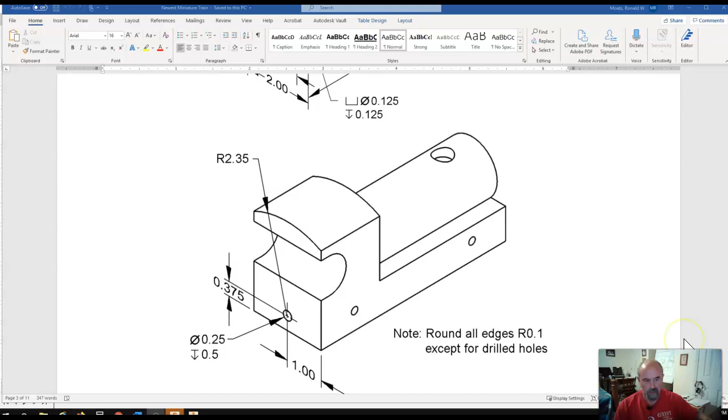This week we're starting off with the train project, and this is what that looks like. Let me shrink this down a little bit.

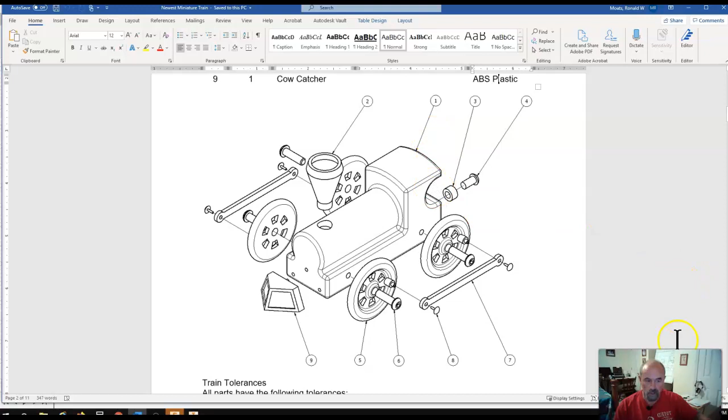So this week we're going to start creating these components in either Inventor, Fusion, or Onshape. If you're watching this video right now, this is for Fusion 360. Looking at this parts list, we're going to be building number one, the train body, today. This is where we're starting, and this is what we're going to be doing for the next 2 days, just building this single part.

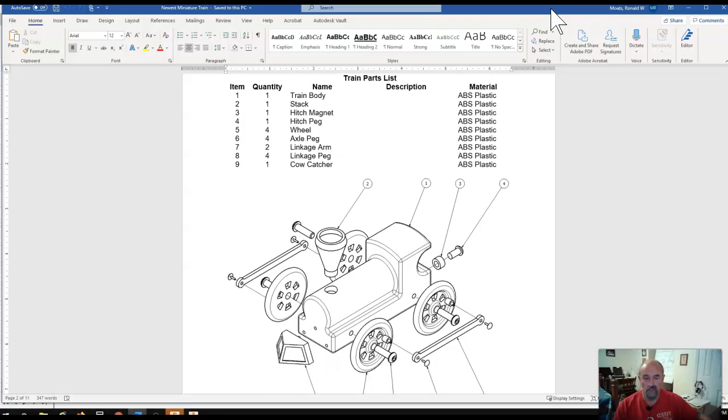So I would like you to possibly print out this dimension sheet, there's 4 or 5 different variables, or take a picture of it with your phone so you can access it while you're working, or any way you can figure out to make this work is good. I am going to walk you right through the process, so if you're doing split window or following this and then doing it, whichever works for you, I completely understand.

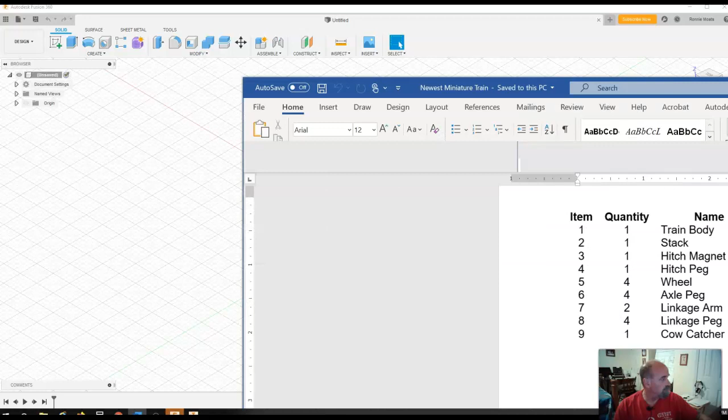Let me pull this out of the way right now so I can see it while I'm working. I've got it up on another screen. Okay, I have Fusion up and running, ready to go.

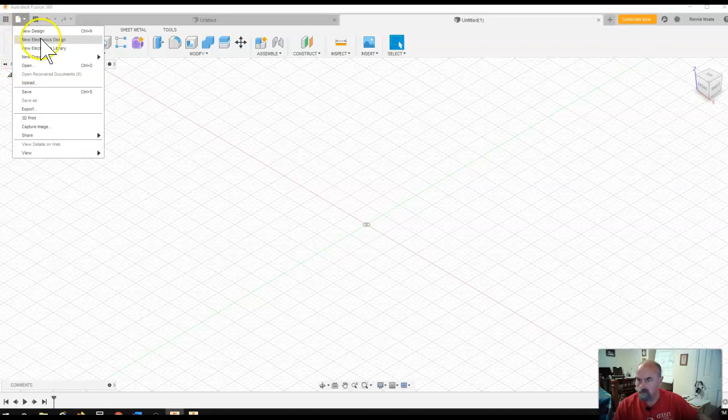After you open it, we are going to come up here above the tool ribbon to File, create a new design, and I need to name this. I'm going to start right off by naming it so I don't lose it. This is train body. Click Save. We've got it saved.

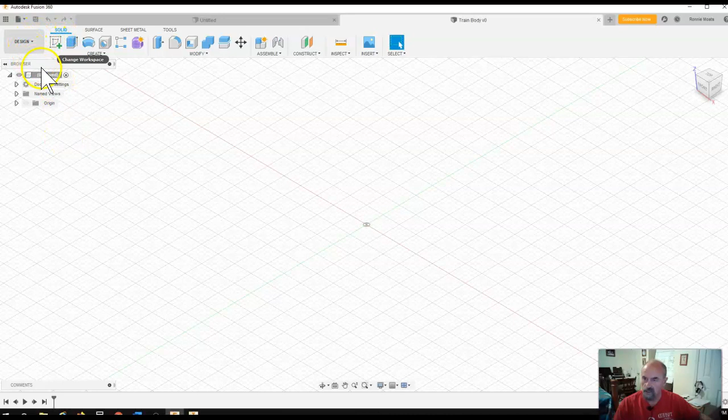First thing I'm going to do is create a new sketch. Come up to the tool ribbon under Solid, create Sketch, and I'm going to click on the front plane. Okay, now before I go any further, I want to make sure I'm working in inches. Document settings, units, inches - I'm good.

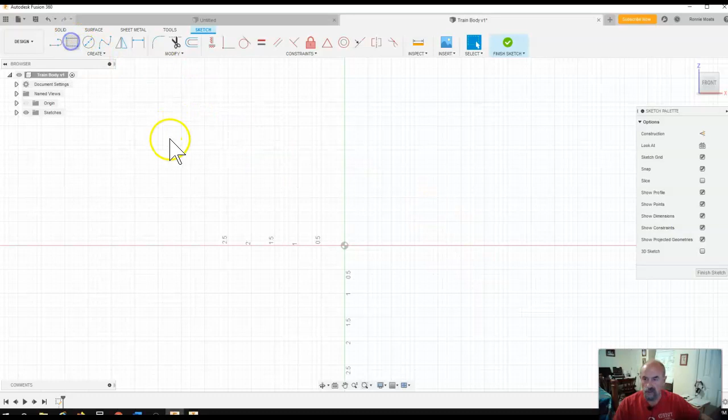Okay, looking at this train, I'm going to create an overall block to subtract away from and then add to, but I want to start with a big rectangular block that's as big as the entire train body. So I'm going to start with a 2-point rectangle.

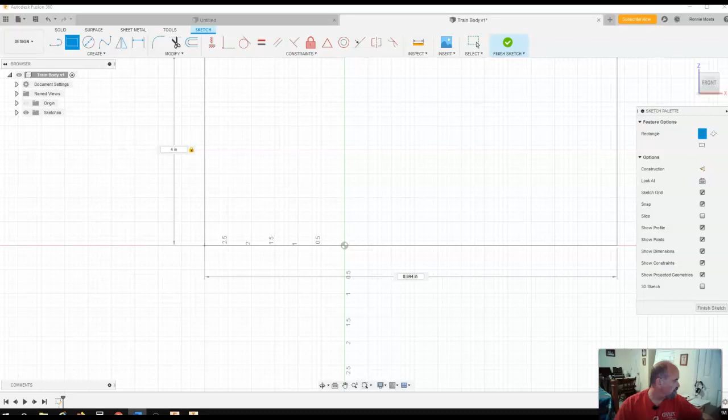I'm going to click on the horizontal line, and in the height window, I do not know how tall this is yet, so I'm going to simply make it 4 inches tall. Tab over to the width measurement, and it says that this is, hold on one second, 5.5 inches long.

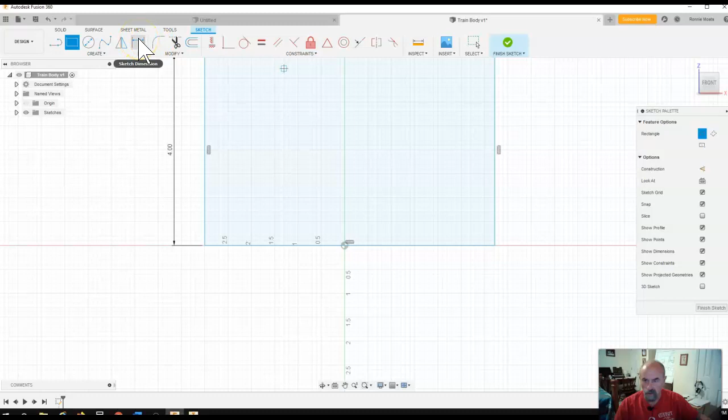So, 5, tab, click once, and I lost my measurement, so I have to come up, click on my sketch dimension, click on the one end, come to the other end, and make that 5.5 inches.

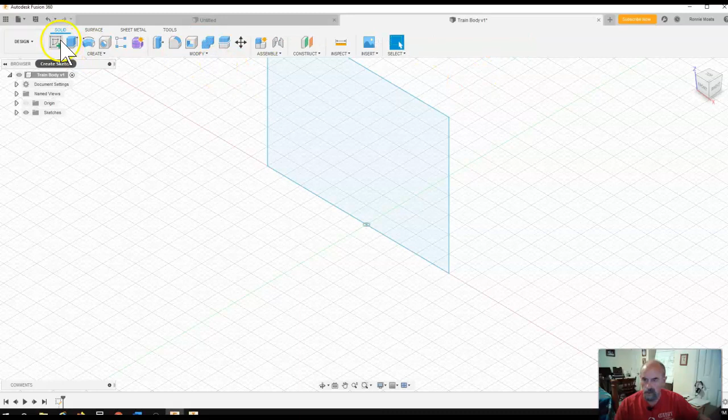And finish that sketch, come up to Solid, click on Extrude, and I'm going to extrude that. Let me check this measurement over here really quick - total width of this is 2 inches. So I now have this big rectangular block.

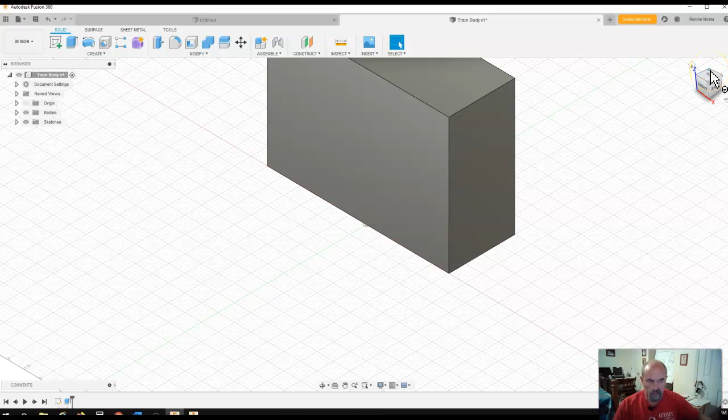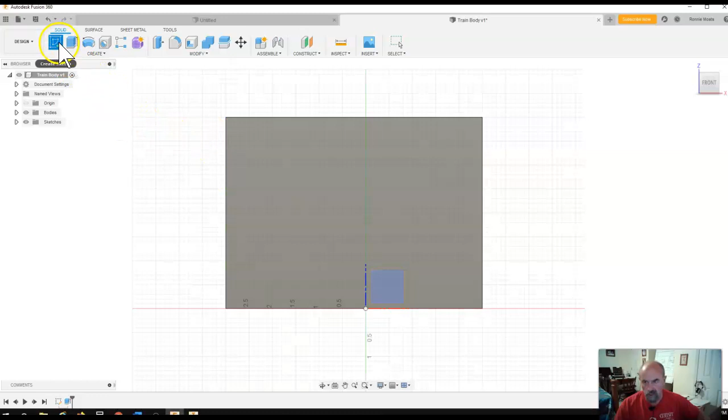The next thing I'm going to do, let me push down on my wheel on my mouse, hold it down so I can pan down here a little bit. I am going to put a new sketch on the side of this, and I'm going to draw another rectangle, starting up here to the left outside of the rectangle and coming down in, such as this.

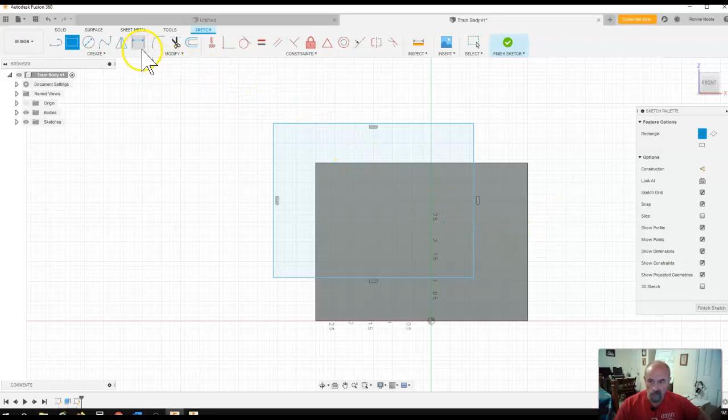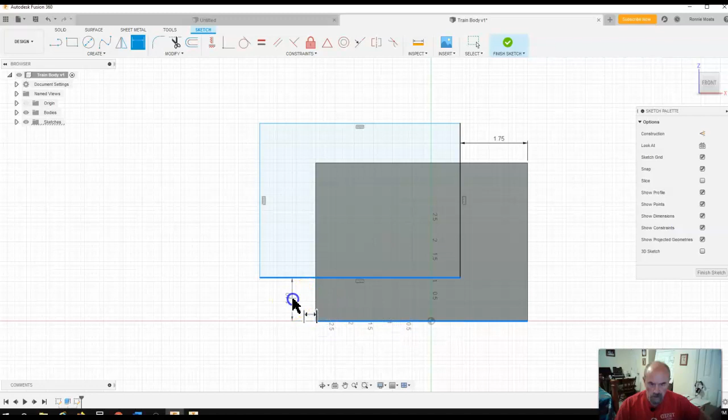Now I don't have a dimension for this rectangle, but I know that this part of the train body here says that it's 5.5 minus 1.75. So I need to dimension this part of my rectangle to be 1.75 inches. And then I need the bottom of this new rectangle to be 0.88 inches from the bottom.

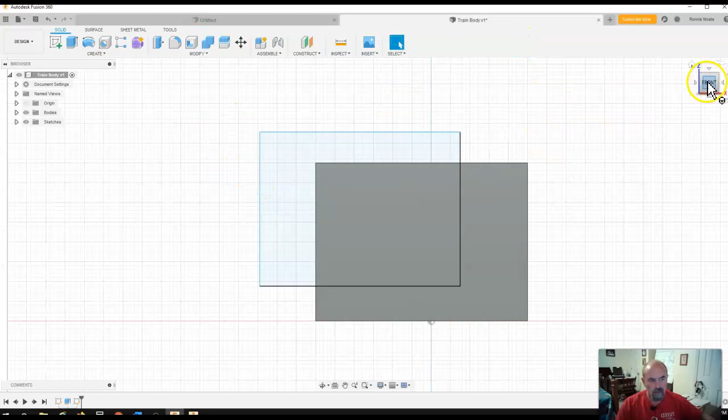All right, I'm going to finish that sketch. I'll come up to the View Cube and click on the Home feature, and I'm going to extrude this, but over here in my extrude window, I want to subtract this.

Operation: New Body, Join, Cut, Intersect - I want to cut this. So I need this arrow to be flipped around. In the direction window in the extrude window, I need to click down and flip that.

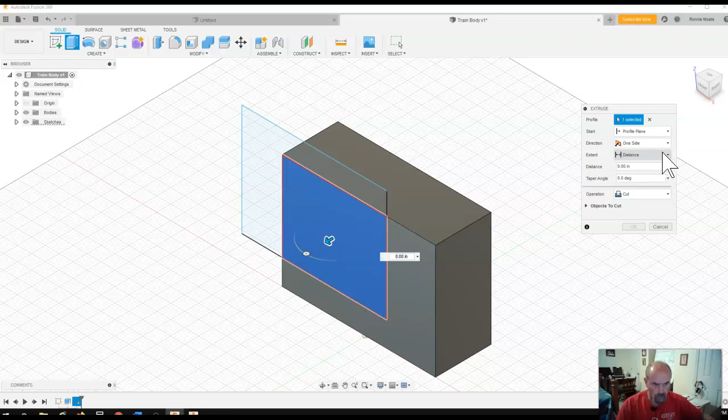I guess I have to grab the arrow and drag it the other way, like that. Click OK. So I should have this L-shaped body here now.

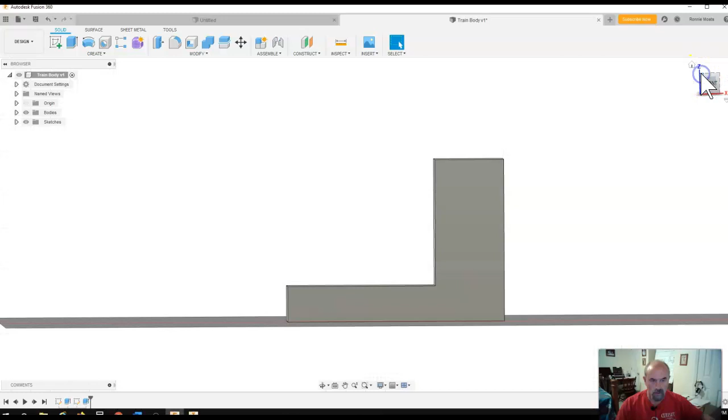Alright, I'm going to put a sketch on the front of this train body here now. Create a new sketch and click on the front portion of this L-shaped rectangle I have.

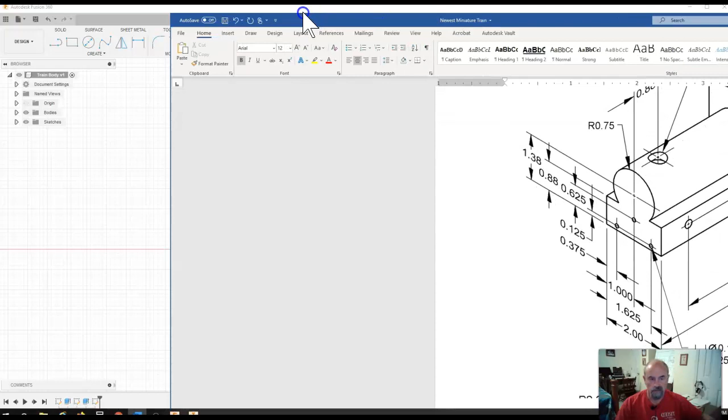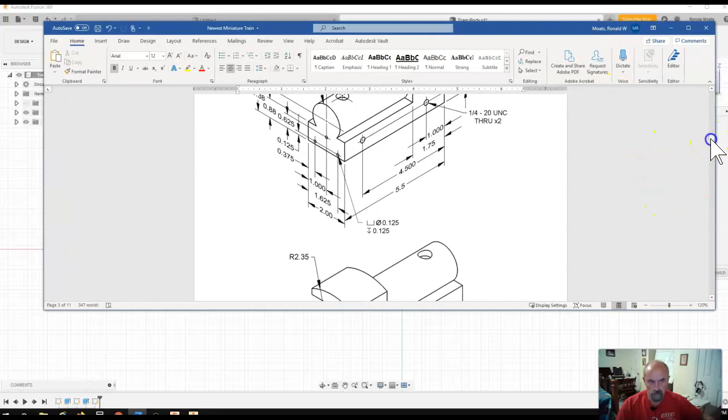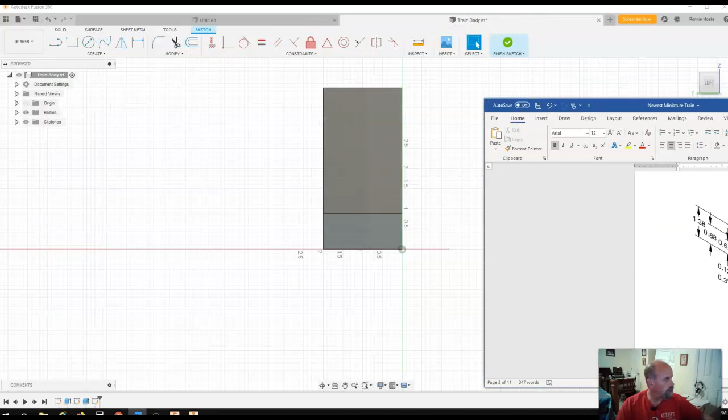Now, looking at this, it tells me that the size of this drum shows right here to have a radius of 0.75, and that the center, if I follow the center line all the way out here, is 1.38 of an inch from the bottom. So those are the dimensions that we're going to have to create, use to locate that.

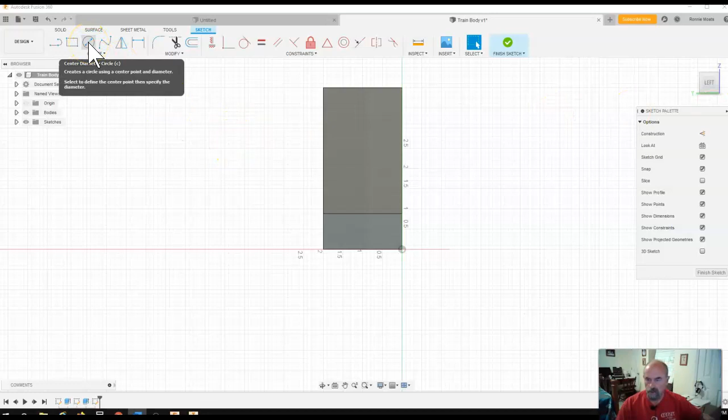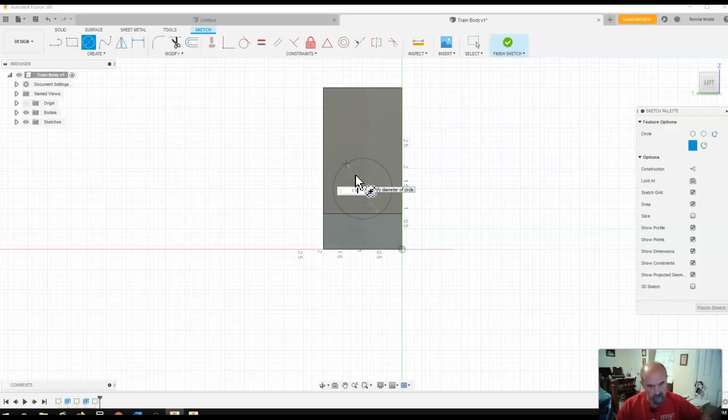Alright, so I'm going to start with a center diameter circle, and I'm just going to place the center point, and it tells me the radius is 0.75. Radius is only half of the circle, so I'm drawing a circle, so I need that to be twice that. So I'm going to, which is 1.5. Circle of 1.5.

Now, I need the center of this circle. I'm coming up to the tool ribbon to get the sketch dimension tool. Click on the center, click on the bottom line, and I need that to be 1.38. Hit enter.

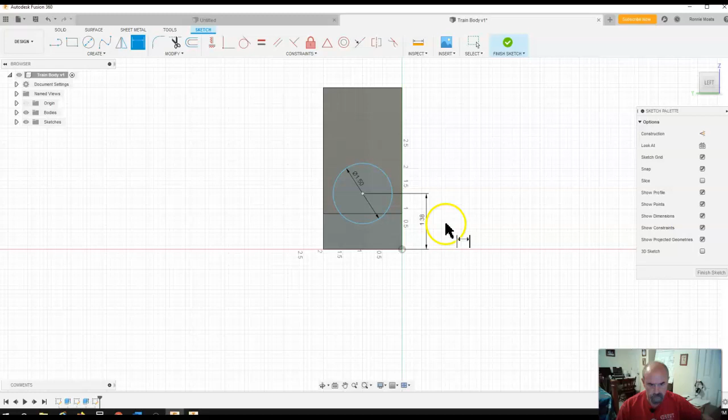And I think it's in the center, but I'm going to make sure anyways. I'm going to click on the center, come over here to the side. Yep, that's 1 inch, so that's in the center. Okay, I'm going to finish that sketch up now.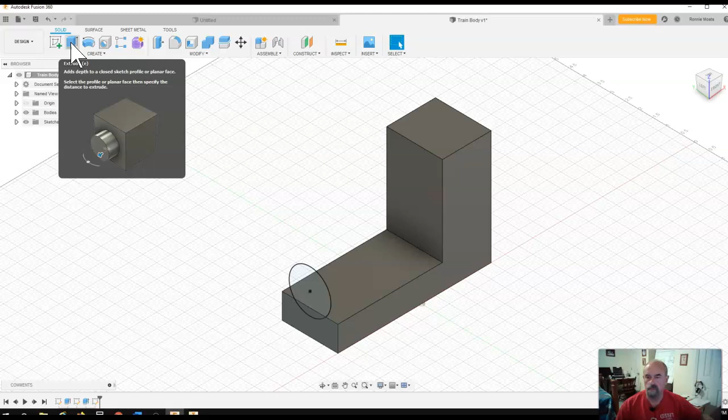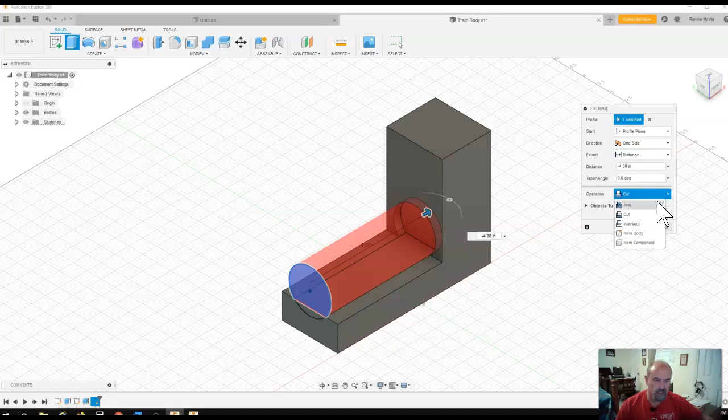Back up to the tool ribbon, to the extrude tool. Click on that part of the profile, and I want it to go the other way. I'm just clicking and holding down on my mouse button and dragging it until it goes through that edge there, just a little bit. And I don't want a cut operation. I have to come back here now and change this to join so that it's all solid. Click OK. Now I have that round tank look to the top or front of my train.

Now, the next thing that I'm going to do is shave off the top of this. All right.

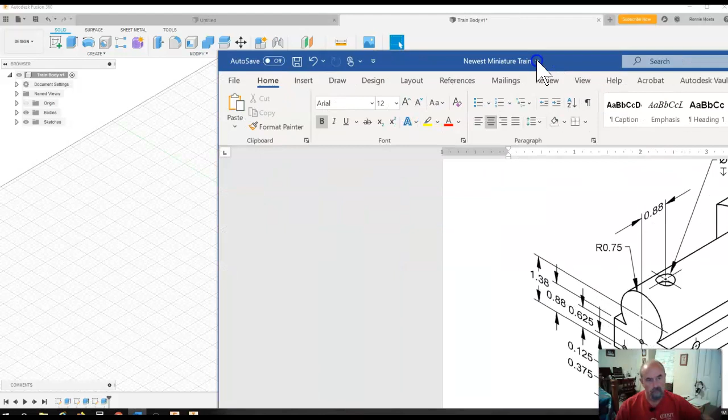So what I have to do is I have to switch views here to look at the back of this train, right here.

Now, it says here that the total height of this train, it says that the top of this train has a radius of 2.35. It also says that that radius comes from this center mark, and that center mark is 0.375 inches from the bottom.

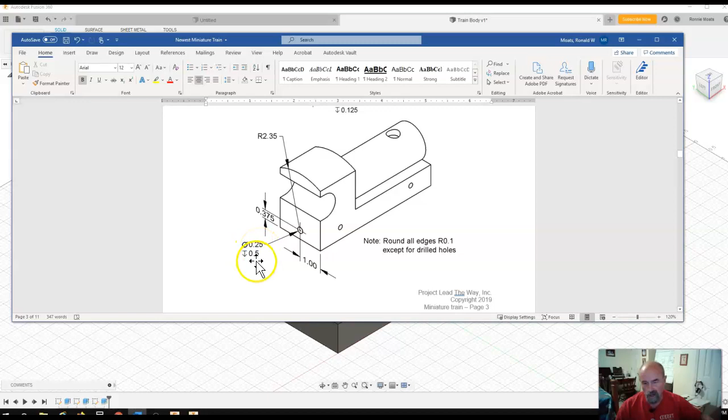That circle there is a hole. It has a diameter of 0.25, and this T with the arrow on it tells me that that 0.25 hole is 1/2 inch deep, or 0.5 inches deep. So that's what I'm going to start with.

As soon as I get this out of your way.

Okay, so I'm going to turn this around, come up here to the view cube, turn it around so I can see the back side, create a new sketch and click on the back side of this.

Sorry, Microsoft Word's running super slow on me and messing things up.

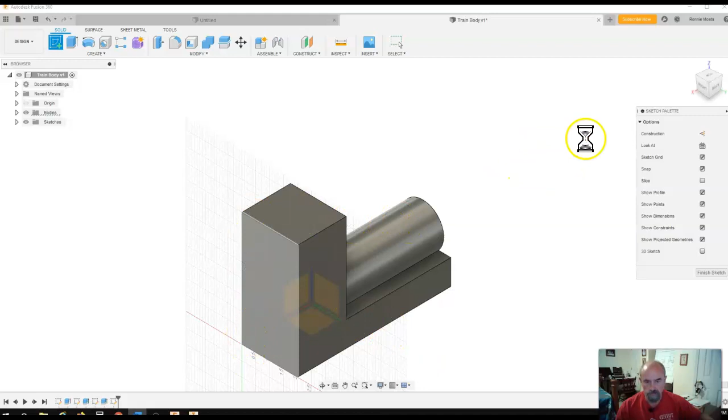Okay. Come on. So there, now I'm looking at the back side, and I need to place a new sketch on there.

And create a circle. That circle needs to be 0.25 inches in diameter. And it needs to be 3/8 of an inch from the bottom, which is 0.375.

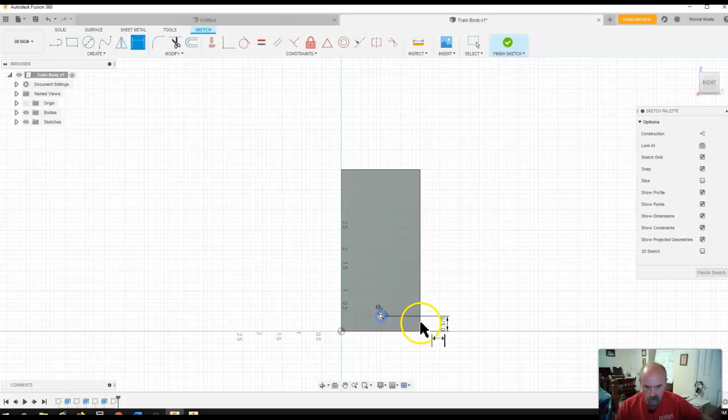Come on, there we go. .375, enter. I'm going to make sure this is in the center, so I'm going to click on the center of that again, come out to the outside edge, and just sit and wait apparently. Center to outside line. There we go.

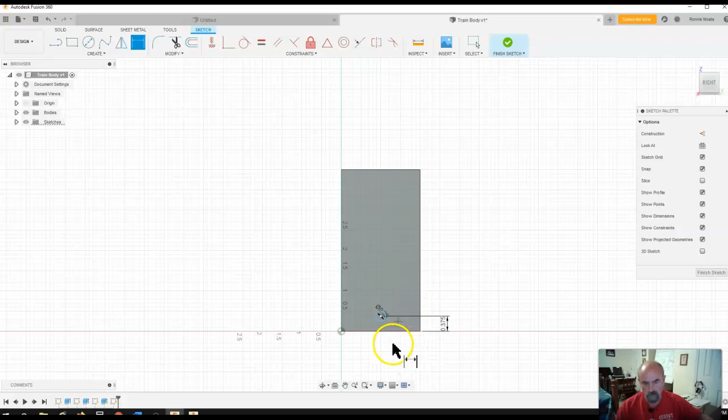Let me try hitting escape. Back up to sketch dimension. Click on the center, the edge, 1 inch, so it is in the middle. Okay. Finish sketch.

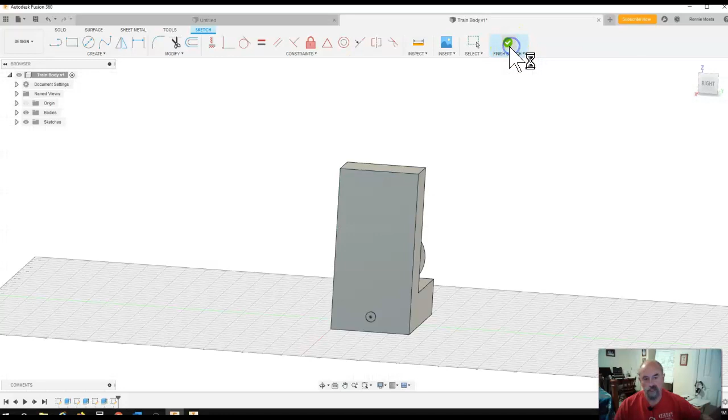Click extrude. Now, I'm going to click on that circle, and under operation I want to cut, and I want a distance of 0.5.

No target body, that's because it's going the wrong way. I have to grab that arrow and turn it around the other way. Now I have to come back. I dragged it too far, so I have to correct that with 0.5. Cut, distance, one side profile plane.

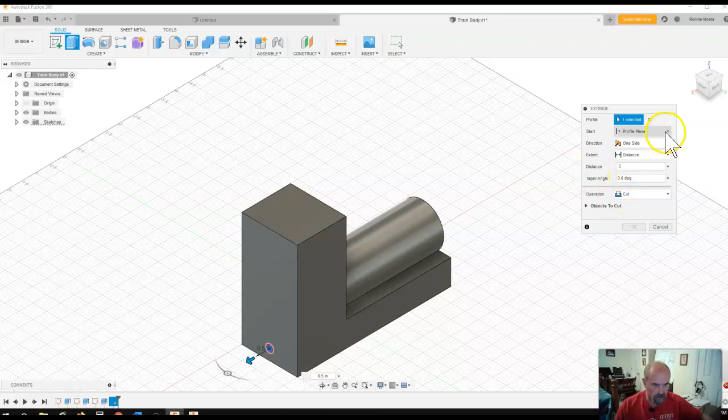Okay, why do you keep doing this to me? Direction.

Let's look at the more info. No body found to cut or intersect. I know, you're not letting me.

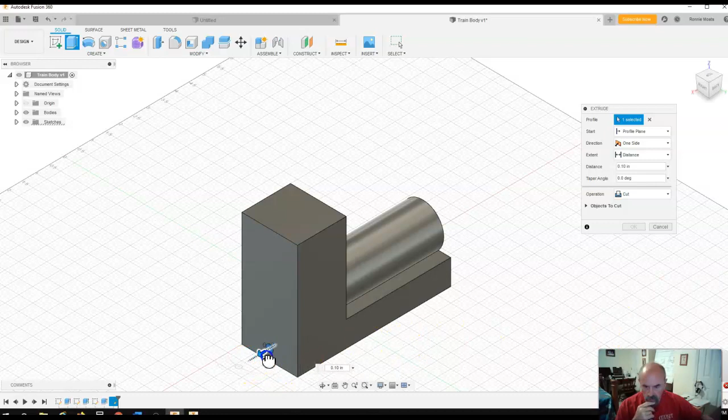Okay, for distance I put 0.5. I need to put negative 0.5. Negative 0.5, yeah. Once you flip it in Inventor, you don't have to designate negative or positive. I understand now.

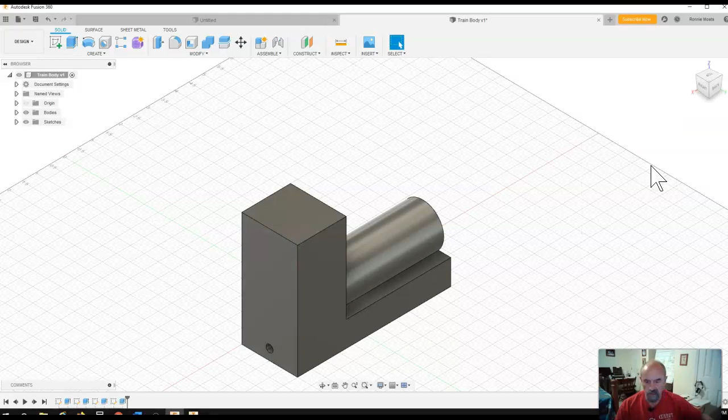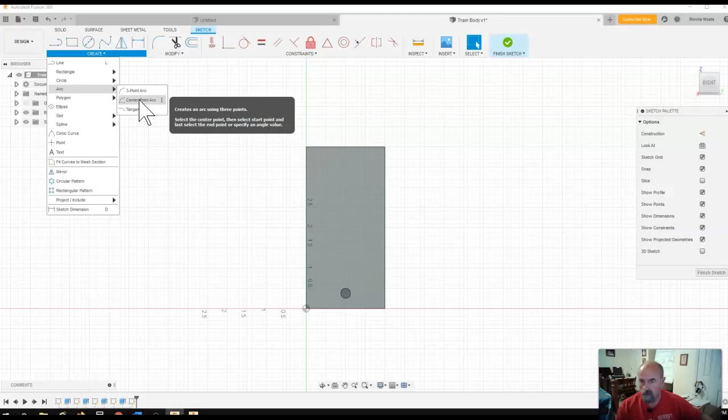Create sketch, click on this back side again. Now I'm in sketch mode. I'm coming up to the top here to create, clicking to expand, and I'm looking for an arc. I want a center point arc. Creating an arc using 3 points.

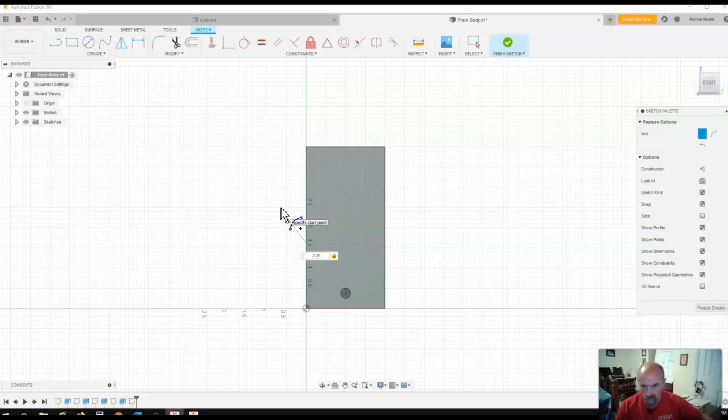I'm going to click on the center of the existing hole we just made, and come up here and type, the radius says that it's 2.35, and I'm going to click once outside of the body, come across the body out into the white space again, and click again. Now I'm going to hit escape on the keyboard.

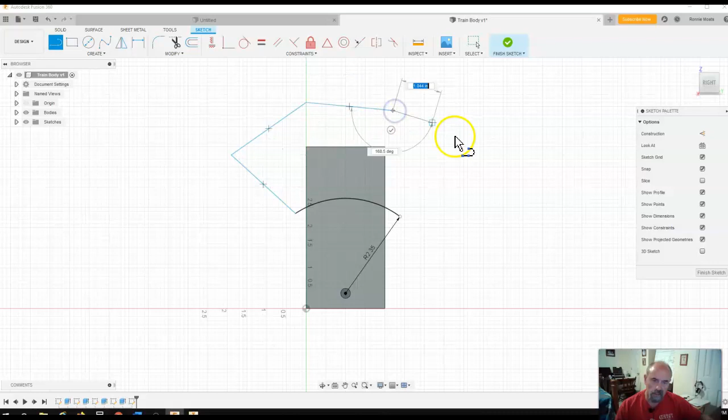And come up here to create a line. Click on the line, come back, and I'm going to click on this end of that curve. Just come up here, click once, click twice, click 3 times, click 4 times, and then come back and make sure that I'm touching the other end of that arc.

Okay, now I can see that it's blue here, so it has created a profile, a continuous loop. So I'm going to click Finish Sketch, click Extrude.

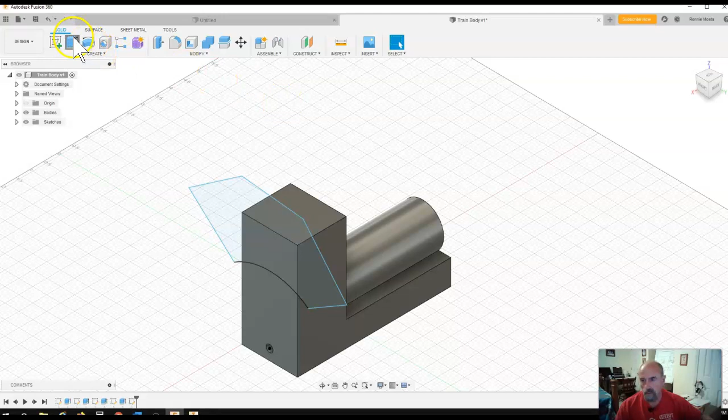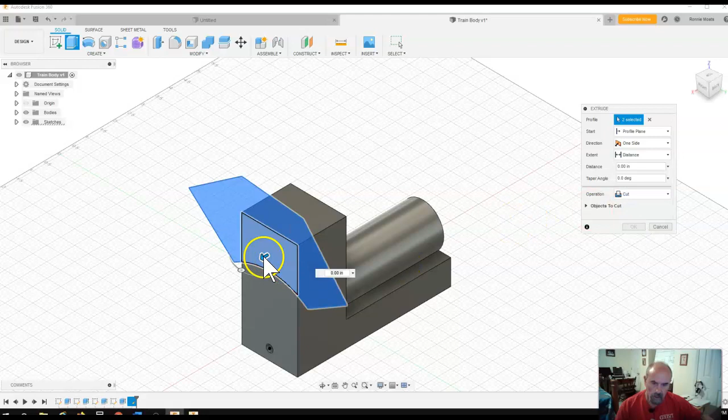Click on both profiles there, so I'm getting the whole thing, and come over to Operation in the Extrude window, click Cut, and I'm just going to grab that arrow and drag it all the way through it. And hit Enter or click OK. Either one will signify we are done.

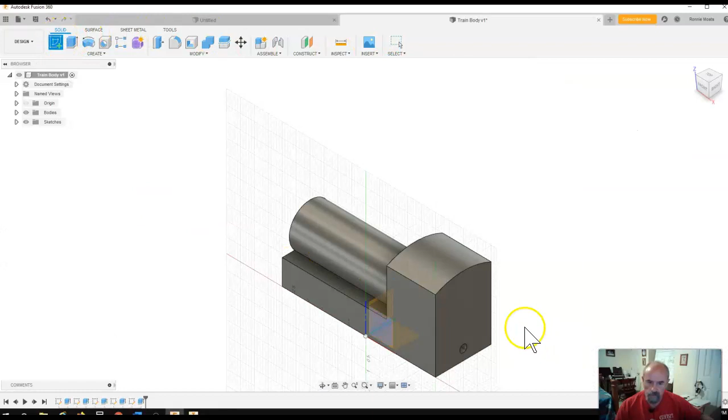So I have one more thing that we need to do on this body, and that is to put a sketch on the side of the train and to cut out the window.

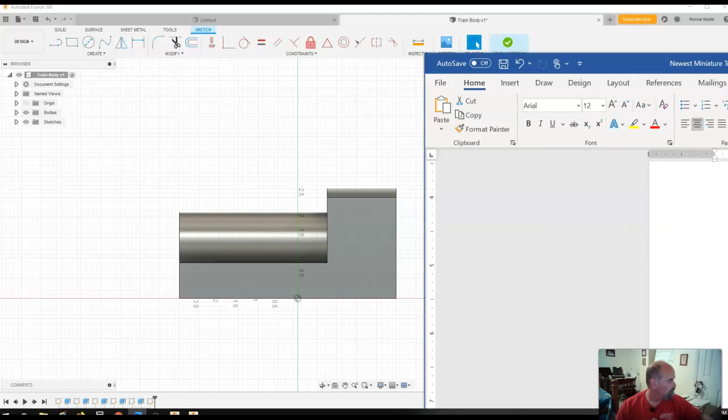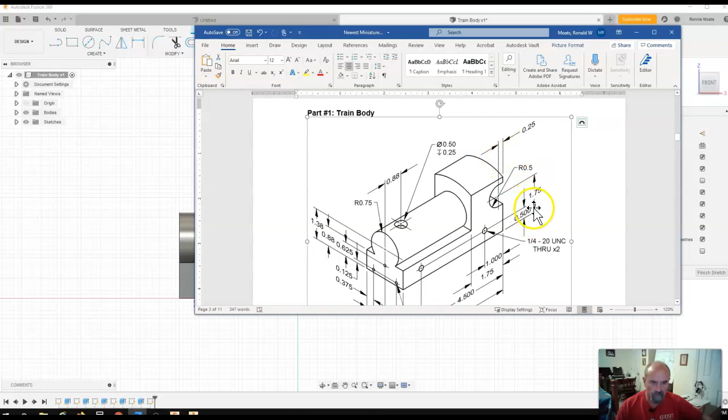Okay, so looking at the top picture of this, it says that this window has a radius of 0.5, or a 1-inch circle, and that the center is 0.25 from the back and 1.75 from the bottom. So that is what I'm going to put onto here now.

Okay, so I have my sketch on the side. I'm going to create a circle, and I'm going to put the center of the circle a little bit to the left of the edge of the body. Click once, and then type 1 and enter.

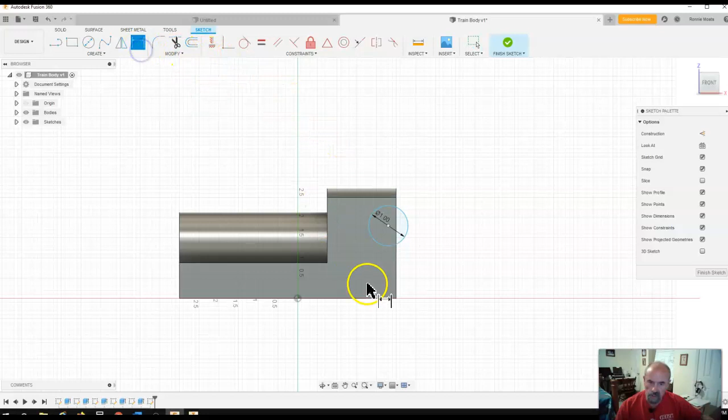Now I'm going to dimension the center of that circle, 0.25 from the back, and 1.75 from the bottom.

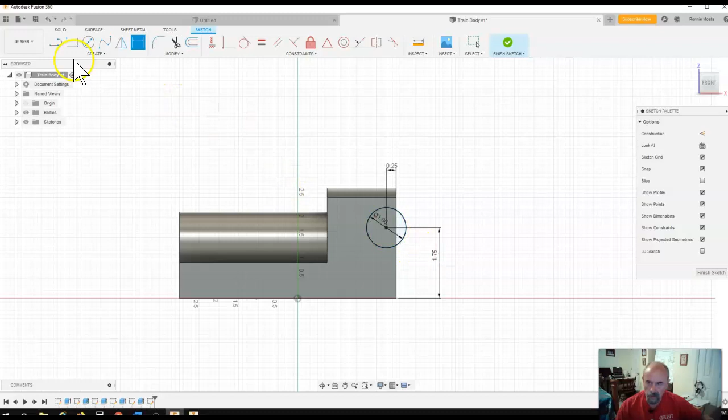All right, now that is not a circle, it is a radius with flats that come out. So I need to click on the line, and I need to, let me zoom in on this just a little bit.

I need to click on the top apex or center of the circle, and it finds it for me there with that X. Click, come back here, just, I don't care how far. Now

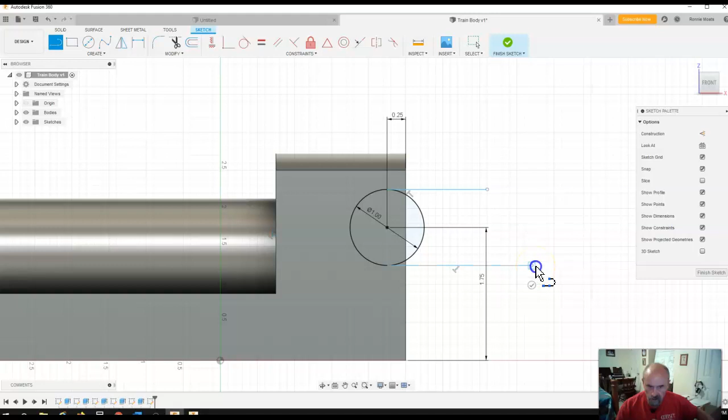I want to hit escape on the keyboard and then start my line over again at the center bottom of that circle. Come out here horizontally, click once, click on the other end of that line, and now I want to use that trim tool again, the scissors, to cut out the part of the circle we're not using.

Oops. Let me see if I can do this without removing that. Finish sketch.

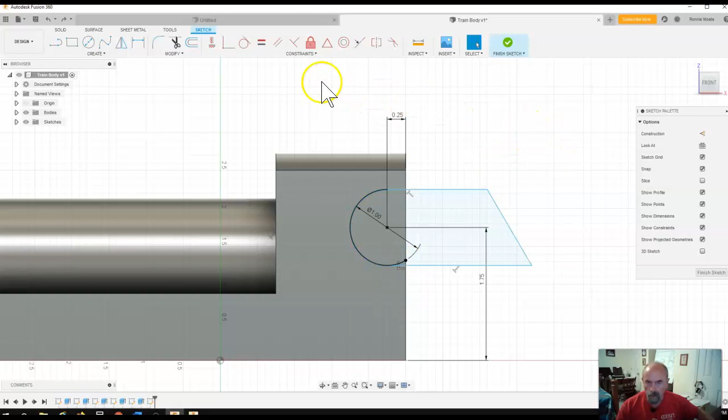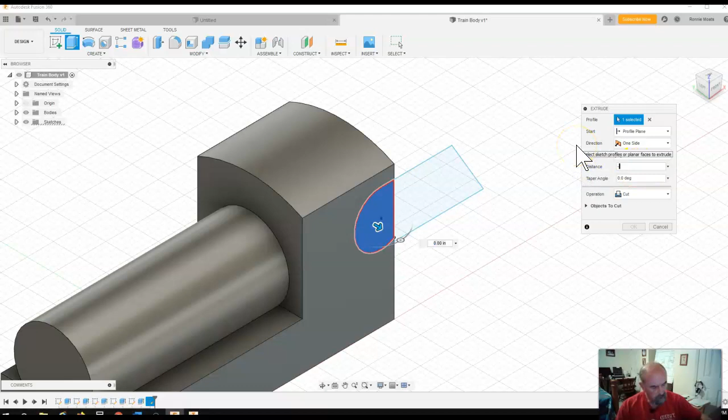Extrude. Go to operation, Cut. That's 2 inches wide, we'll make it a distance of negative 2. Yes, and it works. Awesome.

And that's our train body for today. Come up here, File, Save. Train body, version 1.